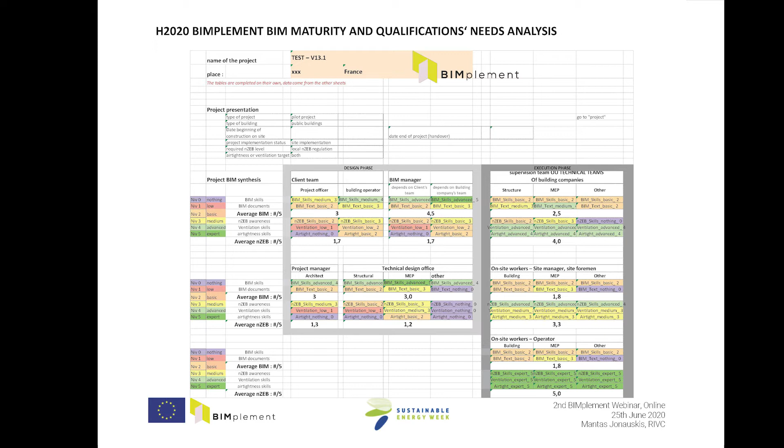Here's an example of BIM maturity level, because we have different companies who understand, who have different BIM maturity levels, and that means that having a different maturity level, they have different qualification needs. There are multiple questions that need to be answered before making a final decision—what kind of tailor-made qualification and tailor-made training program shall be delivered for a particular client.

Here we have some examples on how we linked different tasks with BIM. We were quite busy, and it was quite a challenging task to see what is the common point, the common ground for connecting different competencies, skills, and knowledge with particular processes. So you see that we have a technology or elements level, we have a project stage as S5, construction phase, and then we have a specific BIM object, and then relevant tasks connected to this object.

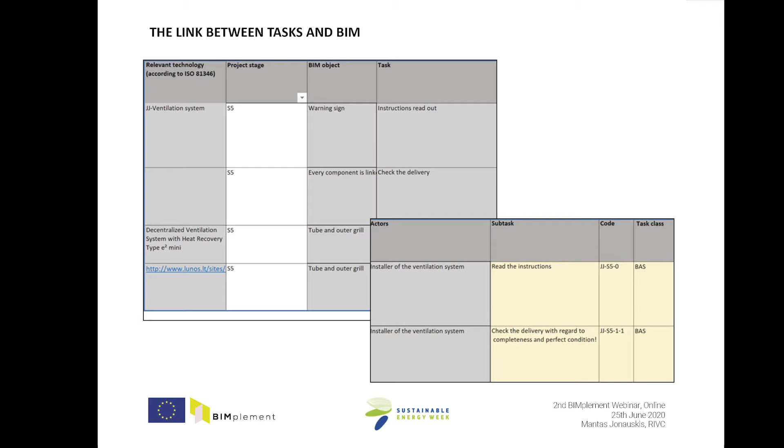That helps one way or another to classify it, and maybe to make it much easier later on to apply or develop a tailor-made qualification for a particular client.

Here we see the link between the tasks and the learning outcomes, which need to be developed before development of the training program.

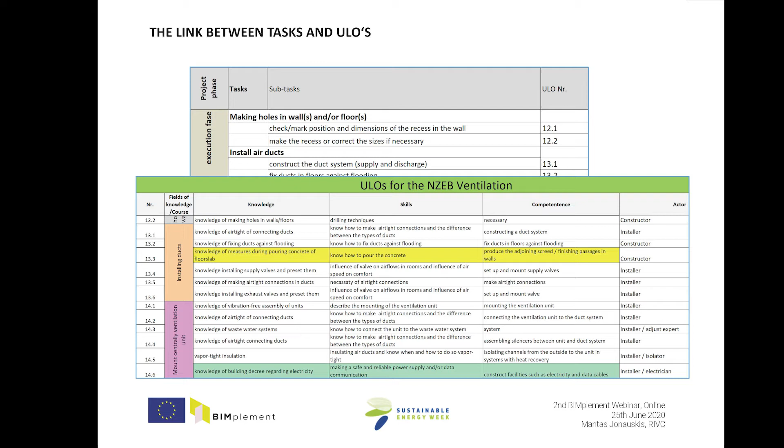It starts with an awareness campaign. It differs in different countries, and it mainly relies on French experience, because they introduced a specific position of BIMplement coach, a person who doesn't necessarily have a very specific BIM background, but has an understanding enough to make different companies aware of NZEB issues and BIM issues that need to be tackled while using different methodologies.

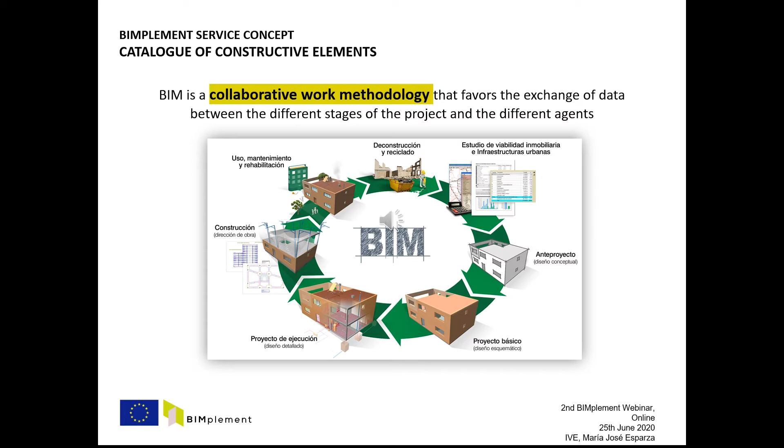In the framework of the BIMplement project, the tool called Catalogue of Constructive Elements has been updated. The catalogue is an official tool recognized by the Valencian Regional Government and widely used by professionals in the sector. It consists of a wide range of constructive solutions that comply with current regulations and contain information on their thermal, acoustic, waterproof, and fire protection performance, among others.

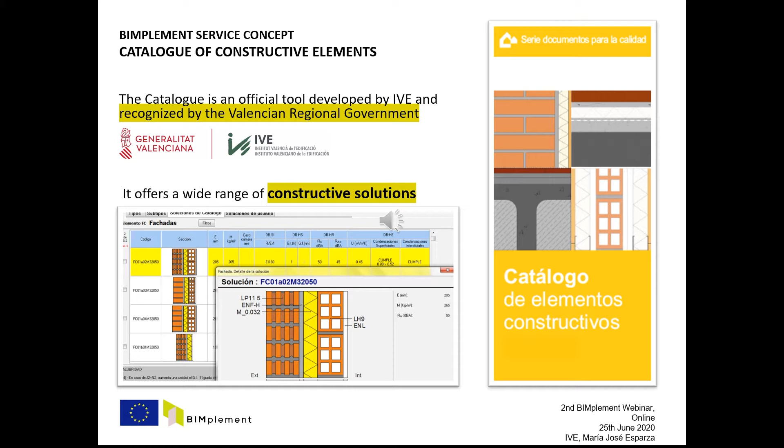In recent months, a new version of the catalog has been created, transforming it into an online application that can be used from any device with an internet connection - mobile phones, tablets, computers. In this way, users can connect to projects stored in the cloud in real time, both from offices and on-site. In addition, the constructive solutions of the catalog can be exported in IFC format to any BIM modeling program. A specific plugin has also been developed to maximize its compatibility with Revit.

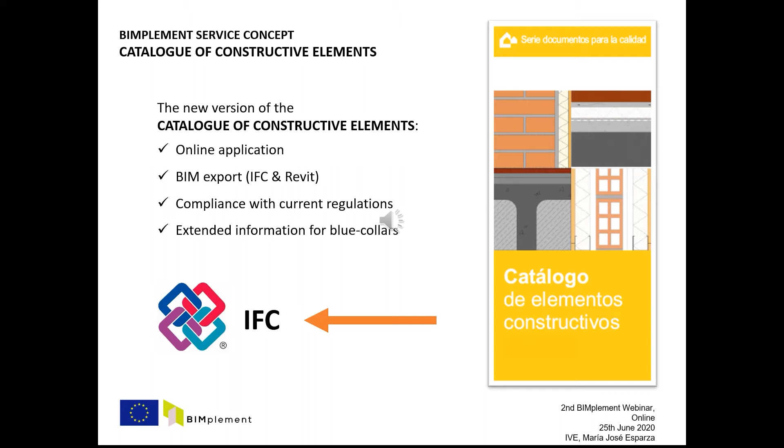To promote the use of the catalog on site by blue-collar workers, the information related to constructive solutions has been expanded. For example, on-site assembly instructions for facades, roofs, and openings, instructions to correctly carry out leak tests that help quality control, or instructions for the correct use and maintenance of the building, among others, have been introduced.

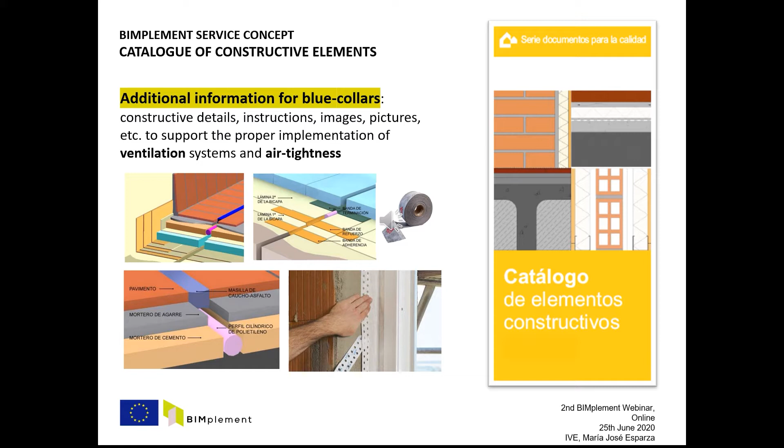In this way, the catalog is useful for different agents - designers, contractors, project managers, but also for on-site workers, such as foremen and even blue collars. The latter do not need to know how to model in BIM, but they can find it very useful to consult the BIM model on site through viewers and thus obtain more information on construction details or instructions for placement-specific solutions. The visualization of the BIM model on site is feasible through tablets or even mobile phones, and today there are several options for viewers, some of them free.

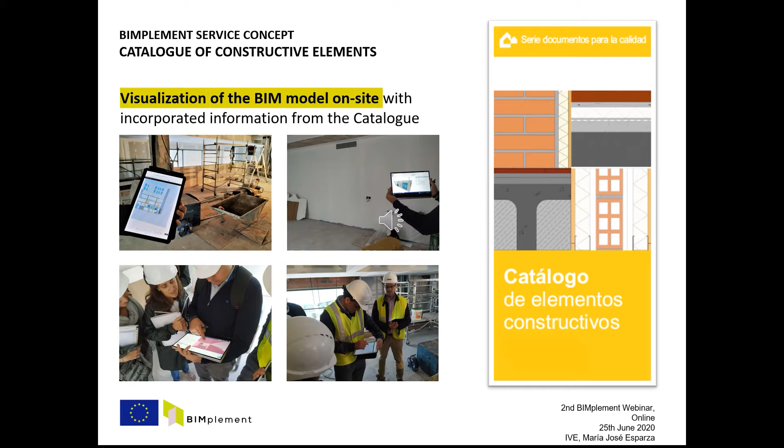The new version of the catalog is available on the BIMplement web. It is one of the educational resources that BIMplement offers in its repository for BIM learning centers that want to exploit the BIMplement methodology in the future after the project ends. In the trainings held in Spain, specific content on the catalog has already been given and tutorial videos have been shared with trainees that already exceed 600 visits.

In addition, the new version of the catalog has already been presented to the Valencian Regional Government, which is interested in promoting its use among professionals in our region, but also in sharing the results with the Government of Spain. This fact contributes very positively to the strategy of replication and exploitation of the BIMplement project that will be spread not only to professionals, but also to decision makers.

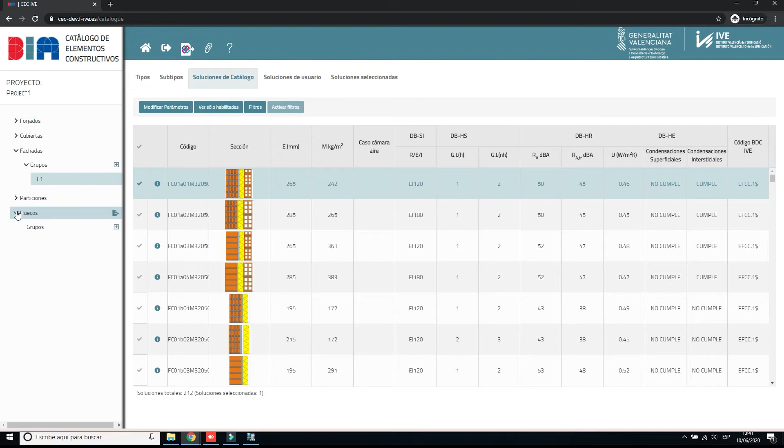And I'm going to do the same with an opening, just to show you how to create a solution defined by user. But I'm going to pick up some random options, just to go faster.

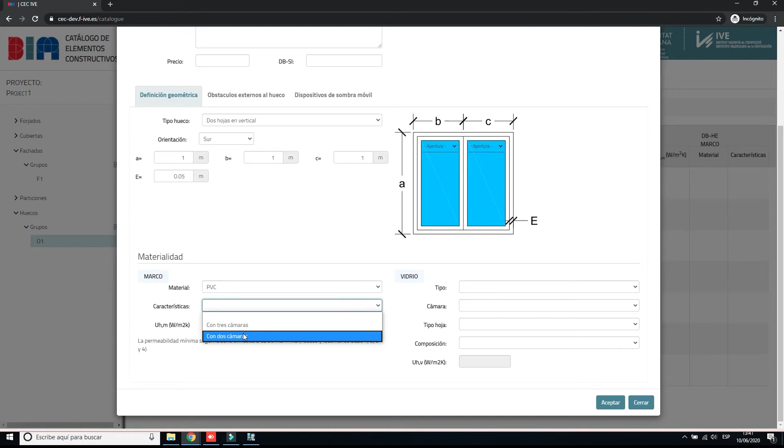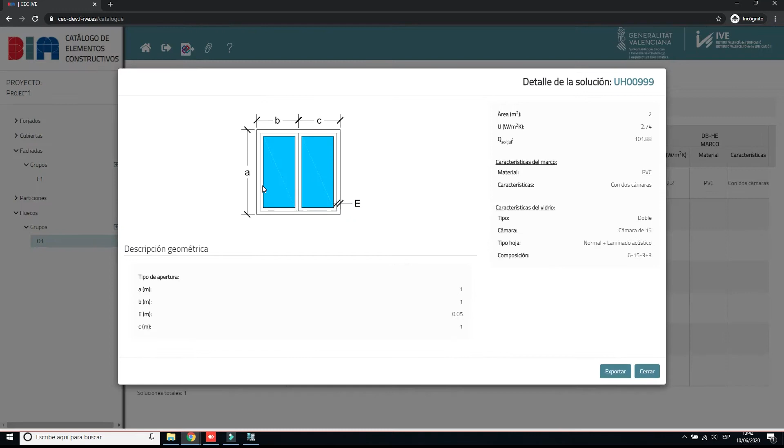Okay, so we have here our element with its properties already calculated. Each of these solutions can be exported in IFC format, and the export can be made by element from this button, by group with this button, or by project with this one. I'm going to add this solution to the project, save changes, and export the entire project.

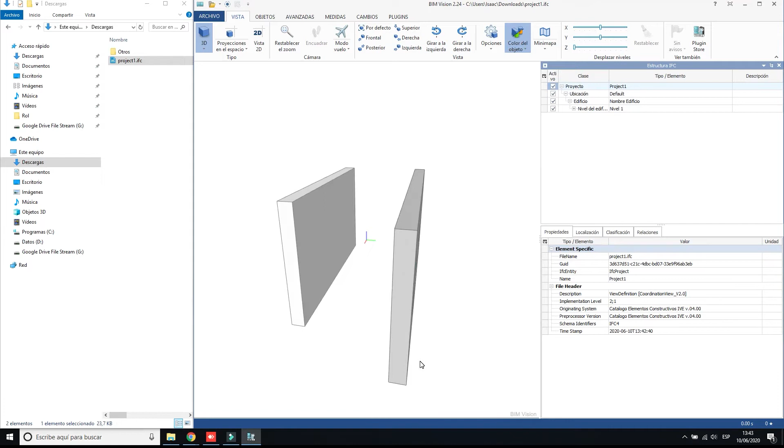Then it generates an IFC file, and to check it, I'm going to open it in a free IFC model viewer such as BIMvision. Here we can see the elements generated in the application and check their properties. For example, for the facade, here we have all the layers, all the calculated properties, and also the links to the related documentation. And same for the window.

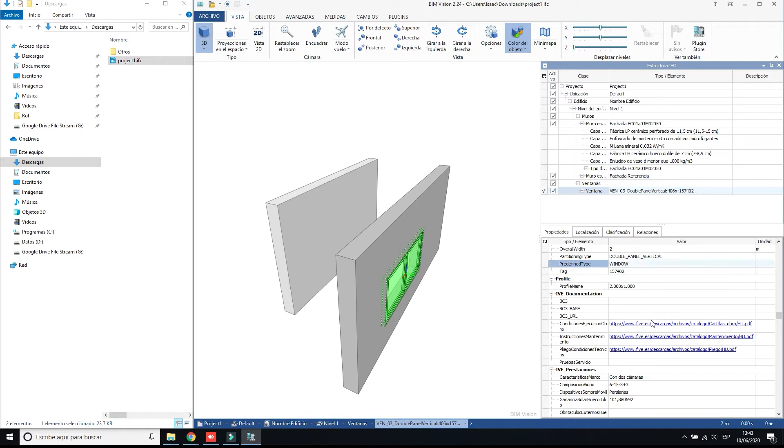To maximize the compatibility of this IFC with Revit, a plugin has also been developed for this program. After launching it, I look for the file that I have already created and select import options from here. They are described in the user manual, and they import the IFC in different ways according to the modeling preferences of each Revit user.

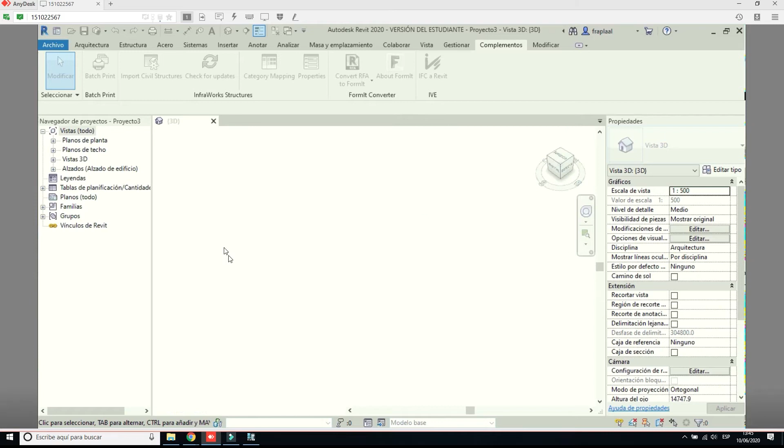So by clicking the Read IFC button, the plugin reads which elements are in the file, and once the process is finished, here I have the window I have created. I'm going to put it in a wall.

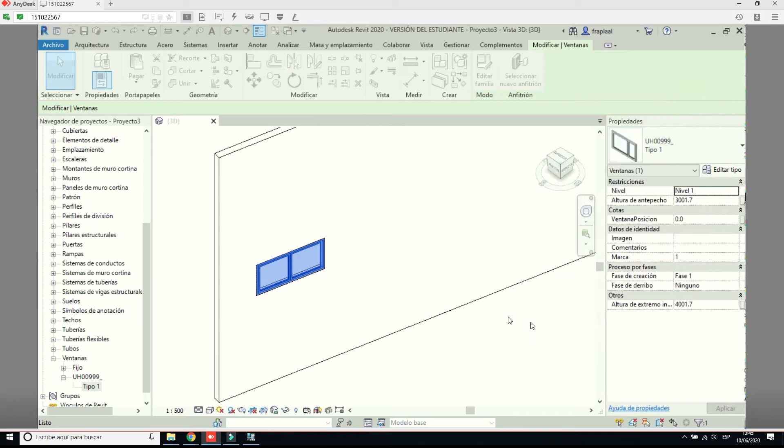Okay, so here is the window with the same properties and the same links to the related documentation. And in the case of the facade, this one is the one from the application with the code of the online application.

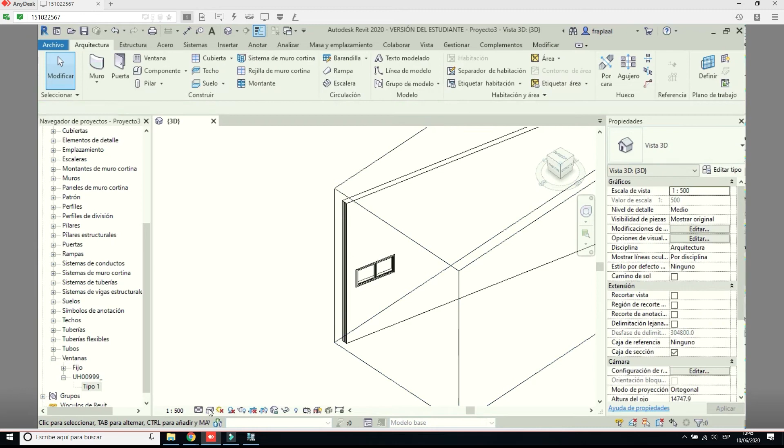And I'm going to show you how the elements are defined by layer. It's also remarkable that in the case of elements that can be defined layer by layer, they are compatible with the layer priority option of Revit, allowing better performance of these elements during the modeling process.

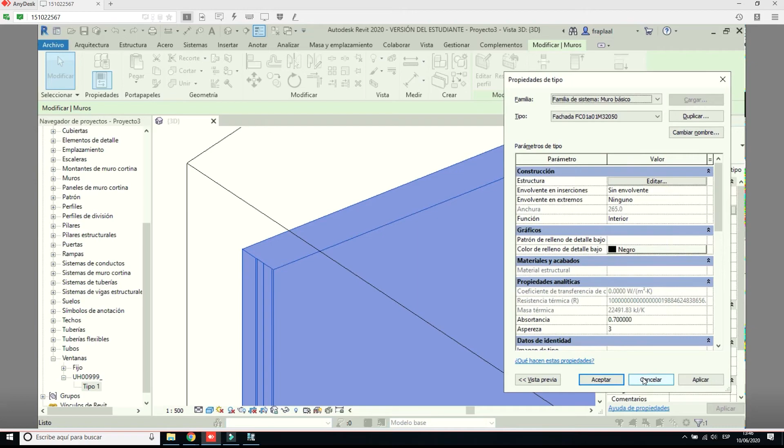Finally, in the question mark of the main menu of the online application, it is provided a user manual, video tutorials, the link for downloading the plugin for Revit, a manual for advanced IFC users with further detail about the labels for the program properties in the IFC format, and the About section detailing the credits for the development of this application. Thank you very much for your attention.

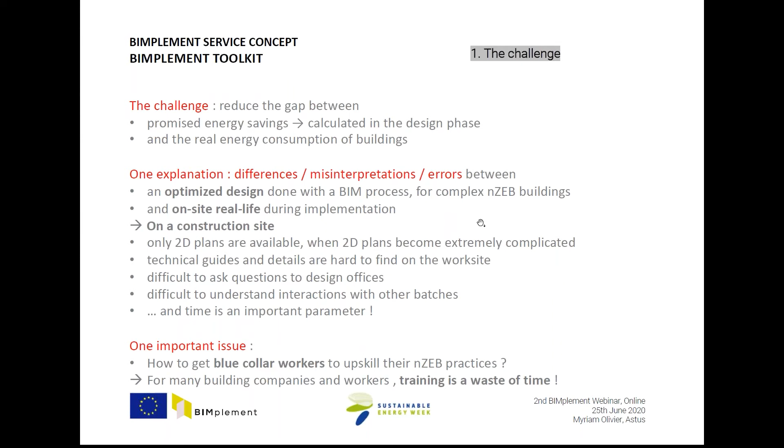Another issue is how to get blue-collar workers upskilled, when neither the blue-collar worker nor the company feels it's useful to get upskilled and take a training session.

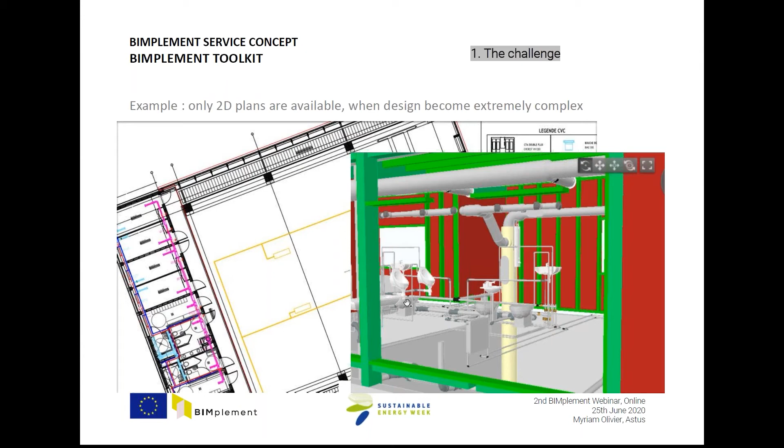Here you've got an example of this question with a complex nZEB building. On the left side you've got the classical 2D plans, and on the right side the same project, but visualized with a 3D model. You can see it's much easier to understand the stacking of the different networks on the right side compared to the left.

What is the proposal? One of the BIMplement proposals has been to help site workers, including blue-collar workers, to implement the project as close as possible to the design plan, and to develop cross-trade and cross-level communication. These two elements are really important when dealing with nZEB buildings, where everything is imbricated and all interfaces have to be really worked out. The proposal we made is centered on the use of a BIM model on the construction site.

2D plans are still used as complements. The first step is to convince the whole stakeholder chain of the interest of such an innovation, which is using a BIM model on the work site. The second step is to train building company employees on the use of freeware viewers and understanding the main viewer tools.

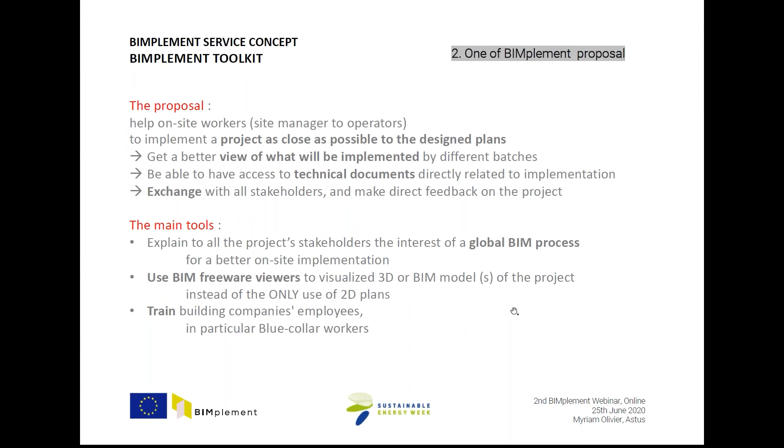What is this training on the viewer for? One purpose is to visualize the 3D work that has to be done. Discovering a project through a set of 2D plans is quite difficult compared to a 3D model. With 2D plans, you have to make your own representation of the building, the different materials to be used, and the stacking of networks. But when viewing a BIM 3D model of the project, you see where everything is situated and what material or product will be used. It's then much easier to show weak or delicate points and discuss with other trades to solve the problem.

The BIM viewer also includes a set of possibilities for exchange and communication, with everybody, all stakeholders—not only the foreman, but also the design office from the company, the project manager, and so on. This question of communication is quite a change in habit, because beforehand you would not have thought that a site foreman could ask questions to the design office about the project. Now it's much easier to do it.

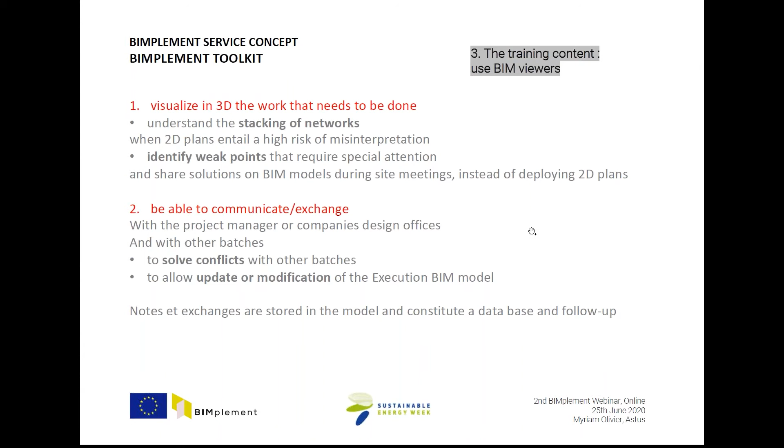It's also much easier to have access to documents, because documents can be linked to the model, as you've seen from the previous presentation. It may be a technical guide, videos, technical or architectural designs, or even an internet link. You can imagine it's much easier to find a document when it's linked directly to the model, rather than searching all around the site, if the document is even on the site at all.

In the same way, you can easily add documents during implementation. You can add pictures of what has been made, because afterward it's going to be hidden behind a partition or something, and it's also a way to show an interface problem with another trade.

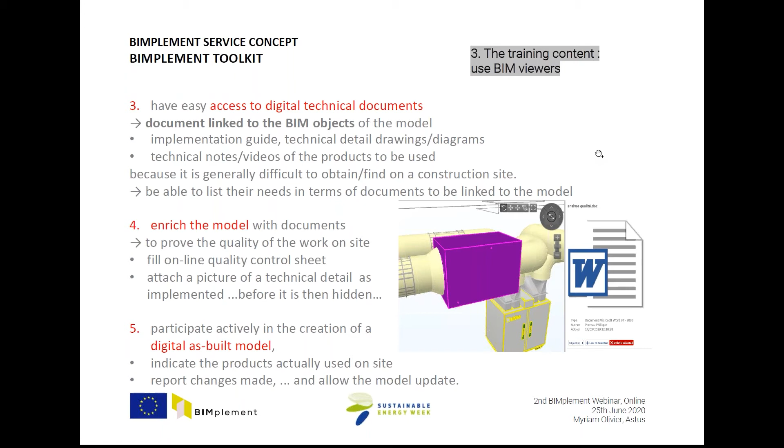Finally, all these tools allow you to participate in the creation of an as-built model, because this tool allows you to inform the person in charge of the design about any updates regarding material, product, location, and so on.

So we first made a very classical one-day training program to go through all these tools and elements. It's a very pragmatic discovery of what a BIM process is and how to use a viewer for better implementation. The training program allows you to manipulate freeware viewers, visualize BIM models, find useful information within the BIM model, insert documents, and communicate via notes and documents linked to the model.

A very classic one-day training. And when we implemented this kind of training, it worked out really fine.

In the end, all companies that took this one-day training have been very, very satisfied, and all are wishing to use this tool further for new projects. So it really works once you explain how useful it may be to use a BIM model, and a BIM model on site works real fine.

However, this training format, a one full day training session given either in a training center or sometimes directly on the construction site, is not easy for everybody to take, in particular for small companies and site operators. Imagine a blue-collar worker working usually on the site - it's really hard for them to take a whole day training just sitting in a room. And for a small building company, it's a waste of time. One day is much too much.

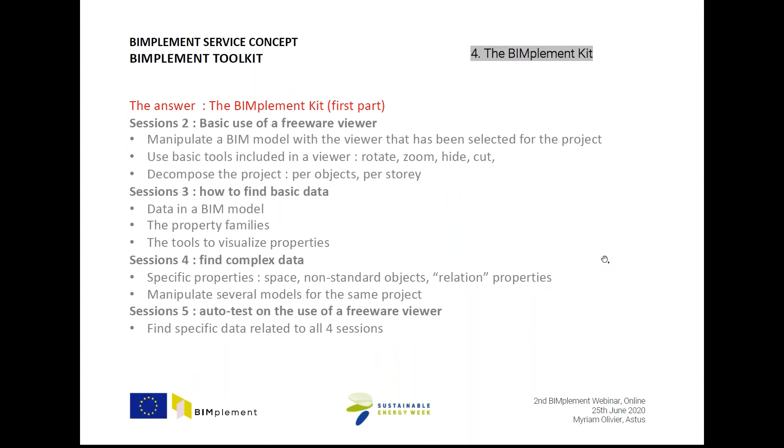Sessions 2 to 5 are the basics - we'll explain the basic tools in the Viewer, how to open a Viewer, how to visualize models, and use some basic tools like finding data in the model, what kind of windows there are, where it's located, and things like that. Maybe part of your site operators will take only these 5 first sessions - it's the basic operator, we just have them implement a model, but they don't have to enrich it.

But for foreman and higher skilled operators, sessions 6 to 12 will explain more advanced tools, dedicated to foremen, craftsmen, skilled site operators who will have to extract data or bring in information that will enrich the model and the as-built model. That is the place where they will be able to get the model, add a picture to it, send a communication note to another batch, or things like that.

These are 12 sessions altogether, 12 hours. At the end of this, it's possible for the person to really use the BIM model on the site, because the training content is directly and completely related to the project they are implementing. So at the same time they are working on the site, they see it on the BIM model with the viewer, and they can imagine what they can do to improve the model.

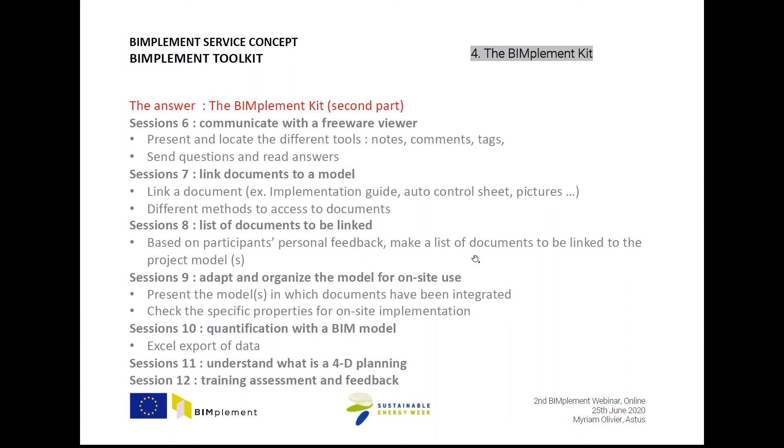One more thing - the trainer, which I presented but real fast, belongs to the building company and has to be trained previously, but he's the one who also knows his guys working on the site and knows the project. So it's just a real in-house training.

As a conclusion, at the moment in France, a lot of building companies are still far from using digital technology during their work in the design office, but all the more on the construction site. Once building company white-collar workers have been trained on the interest to use BIM models for better site implementation, there still are difficulties providing training to blue-collar workers. This BIMplement kit is an answer to the difficulty posed by building companies that are reluctant to train their blue-collar workers through classical training in a training center. The building company will bring the training to their blue-collar workers themselves. That is quite new, but it works.

Hope you can try it one day. Thank you.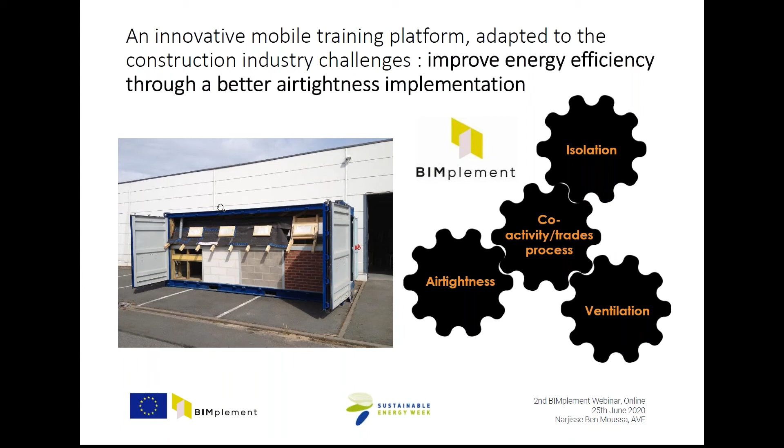So the on-site, hands-on training we commonly call FIT, which is Formation Intégrée au Travail, is an innovative mobile training platform. As you can see here in the picture, this platform gives workers on site the opportunity to work together. Many trades and activities can work together on this container on issues of isolation, airtightness, and ventilation. The idea is to improve, by the end of the day, the energy efficiency, which is much related to these issues of airtightness and ventilation.

The training content of the FIT container is focused on training blue-collar workers on the construction site. We bring the container to the site, and we organize groups of different trades to work together and coordinate, so they can see in a real situation, on the container, how to work together, especially how to solve technical problems due to ventilation and airtightness.

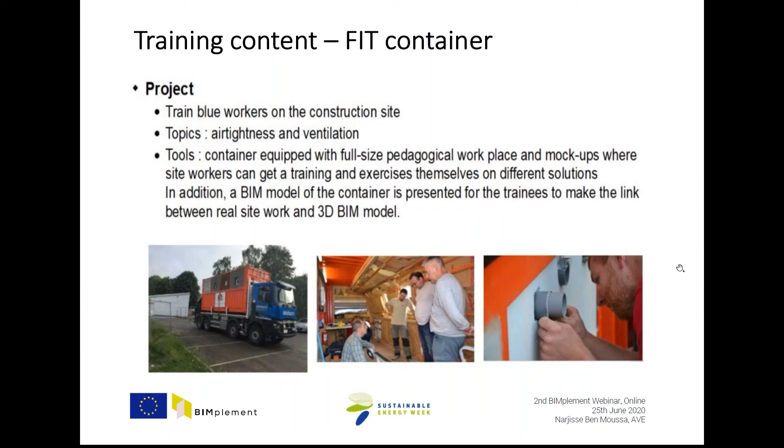Here are more pictures where you can see the container and people working together, using different materials, different tools, different approaches, all together so they can understand the realities of each trade, and especially work together to make sure there are no technical issues, especially on ventilation and airtightness, that would make the energy efficiency weak.

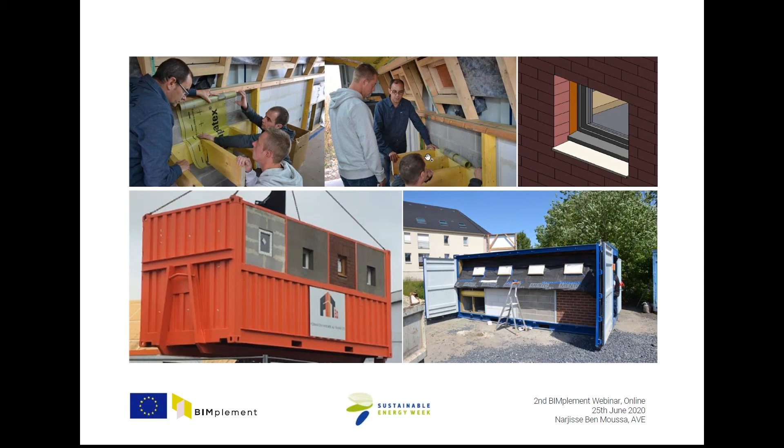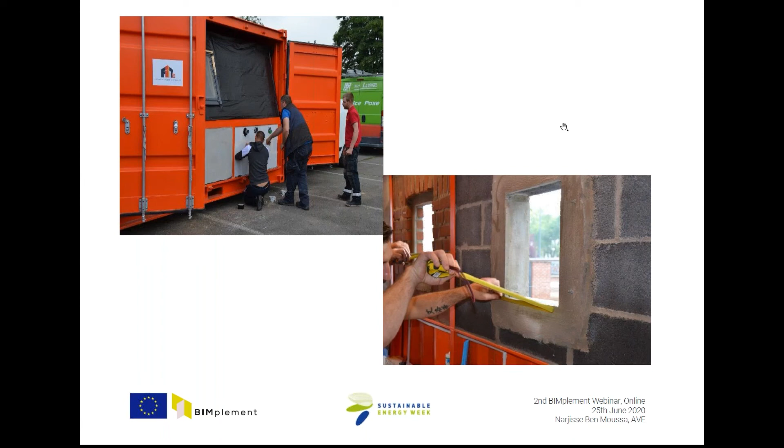More pictures illustrating the work on site on the container. This is hands-on work, so it's about people in a real situation working on this. The training is organized in different modules, which we'll see afterwards combined with BIMplement on-hands, on-site training. This picture illustrates the final module, which is a work assessment or quality assessment module, where we do the blower door test, which is compulsory under French regulation, and we can do it on site, in a real situation, so we can see directly if we pass the test or not.

Usually we have very good results after the training, because it's clearer for everyone, and people can be in a real situation and see the interest of all the technical issues usually faced on construction sites. Most of the time we have very positive feedback, especially regarding this blower door test, where we have 3 or 4 times better results than similar buildings where no container training has been performed. These better results make our clients, public authorities, private stakeholders, social landlords, etc., ask and demand this training for other projects they will be implementing or have already implemented.

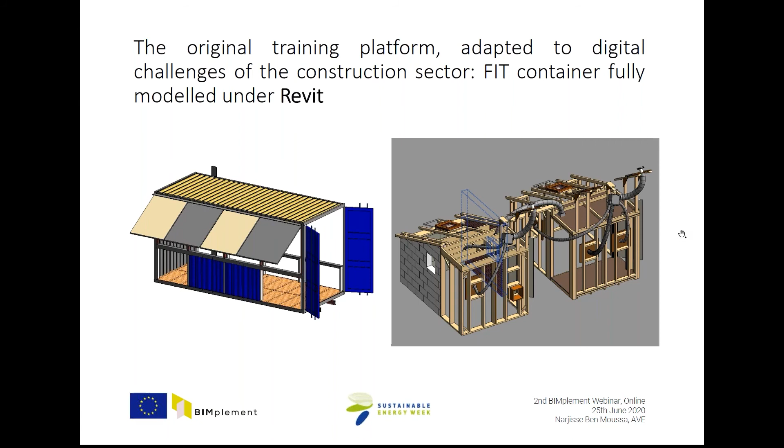So the training is combined depending on the profile of the participants: management, site operators, foremen, etc. Module 1 is more about awareness, and module 1 and 4 target all the profiles, more about BIM awareness and assessing work quality at the end of the project. In module 2 and 3, they target different profiles. Module 2 is to make sure that management understands the interest of BIM, etc. Module 3 is more about how to implement the 3D BIM model on the container in real life.

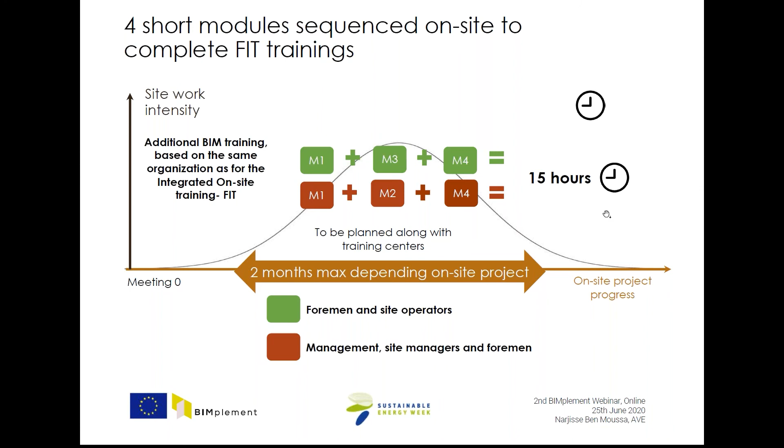So yes, we have different modules and different profiles, as you can see. The idea is to make 15 hours for the whole training, and the training is usually planned along with the training center and implemented during 2 months max, depending on the site project. Also, additional BIM training can be done based on the same organization, etc., depending on the needs.

So, as I said before, BIM model training is more about raising BIM awareness, especially regarding the BIM process mapping, visualizing the performance link between a site model and energy issues, etc. Please remember that we're still talking about the BIM model of the container, the physical container, where usually workers and management, especially workers, are practicing before doing so on the construction site.

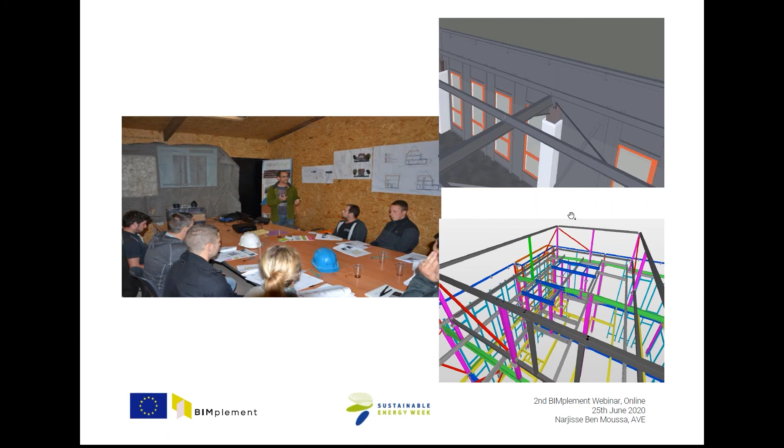We are using BIM building learning models, using and manipulating a viewer, slide presentations, as you can see here. So these are two groups, and both groups can have more insight on BIM and the BIM process. Regarding module 2, it's more a module based on performance, near zero energy, airtightness, BIM model on site management tools.

So we make sure that management understands the interests of BIM, but also how management is going to develop the BIM model and put the documents, etc., so that later on it can be implemented on the container, implemented in real life.

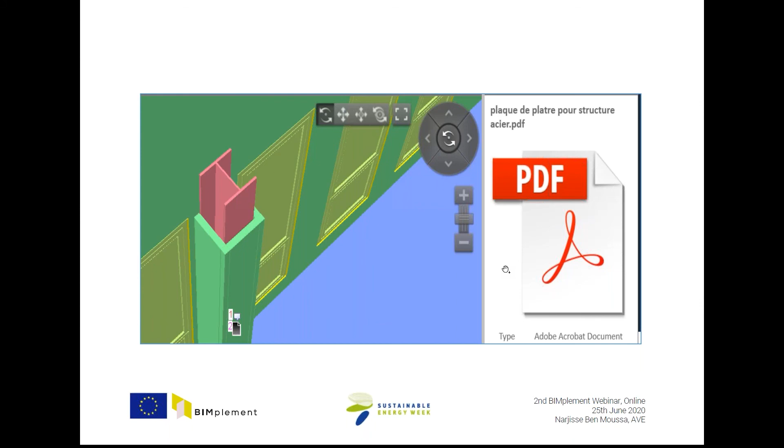So here you can see a screenshot of the BIM model, and we have document 1 and 2. This is something where we can put documents attached, so workers on site, foremen, can go click and have all the information about, for example, a technical issue related to airtightness, and they can have all the information.